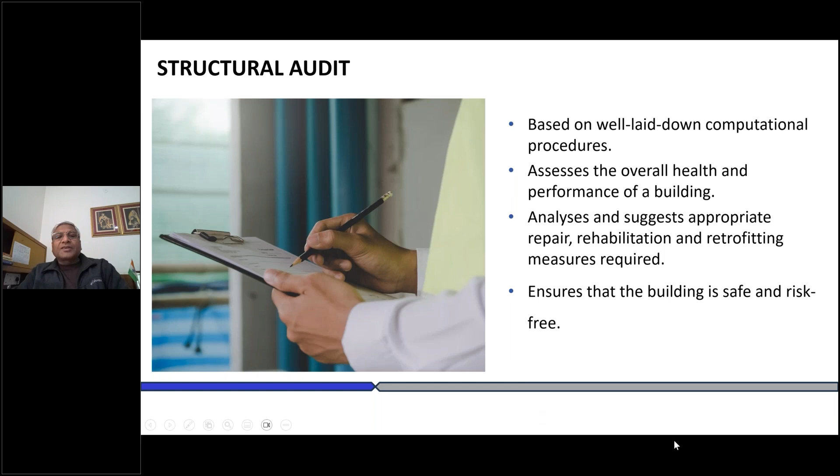Let's understand the other terms also. When we say structural interventions, we have several terminologies like repair, rehabilitation, and retrofitting. Let's try to understand all three terms, what do they actually mean? Because intervention means either you will be doing some kind of repair, rehabilitation, or retrofitting.

Repair is basically intended to improve the functionality of a component in a building that may have been rendered defective, deteriorated, or damaged due to some reasons. Repairs are usually non-structural in nature, but if not attended to, they will lead to more serious implications with time. So if you attend to it and repair it, it will probably increase the life and prevent further deterioration of those structural elements. So this is just repair — you cannot say it is a structural intervention, but yes, it helps in structural safety.

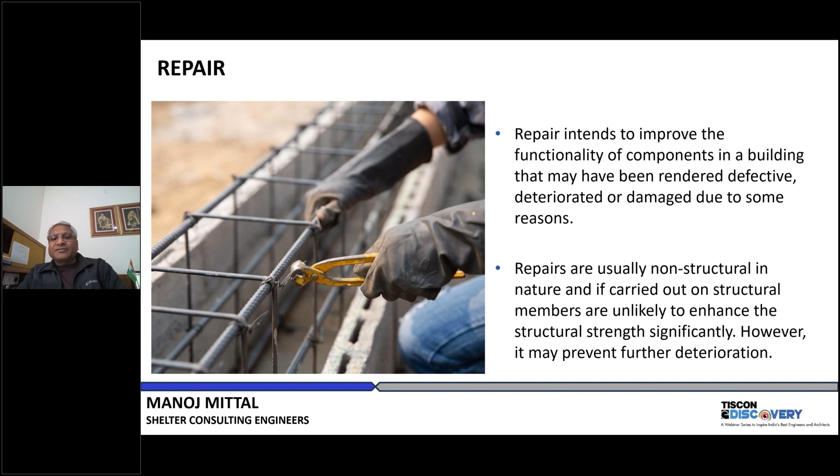Then there's another term, structural rehabilitation. This is the structural intervention to improve the strength of the components of a deteriorated or damaged building. It intends to regain the original strength of those structural members, bringing back any structural member to its original strength.

The term restoration is used interchangeably with rehabilitation. Generally, for historical structures, we can say restoration or rehabilitation. But essentially, rehabilitation means to bring the structural elements to its original strength. Usually this is the meaning of rehabilitation. Rehabilitation is a structural intervention.

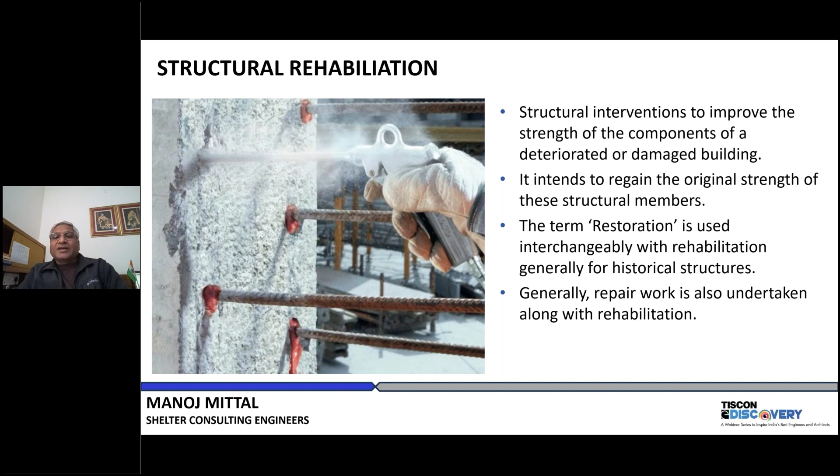Repair is usually not a structural intervention, but it helps in structural safety to some extent. It will prevent further deterioration.

And then there is structural retrofitting. The most commonly used term is structural retrofitting. It aims to enhance the structural capacities like strength, stiffness, ductility, and stability of a building. It mitigates the effect of increased load demands, including future earthquakes. The terms seismic rehabilitation, seismic upgradation, or seismic strengthening may also be used instead of seismic retrofit.

The building need not be damaged for retrofitting, because if you have an existing building, you can still retrofit it for higher demands. There can be several reasons for retrofitting, which we'll see later. But usually these are the terms being used: repair, rehabilitation, and retrofitting.

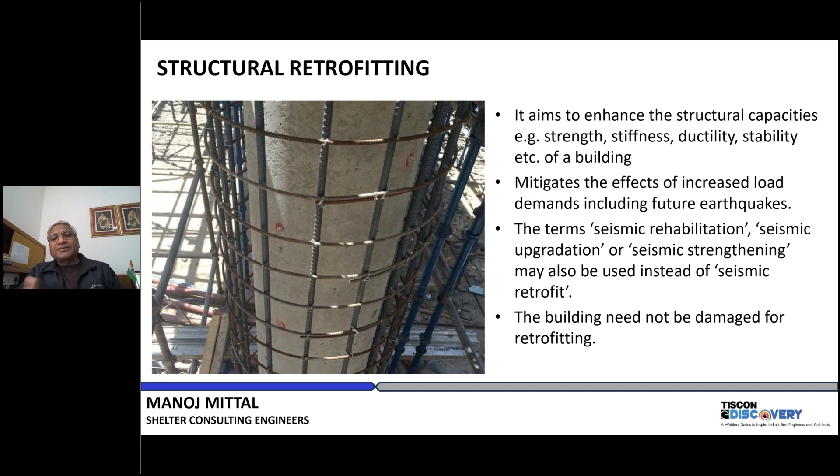So we say repair is not retrofit. If you see this figure, on the vertical axis you have performance, and on the horizontal axis is time. If you do repair, the performance will not increase, but it will not deteriorate either. But if you do retrofit, whether modest or comprehensive, it will significantly improve the performance of the structure, as shown by the small and bigger arrows. So retrofit will increase and enhance the performance of any structure or building.

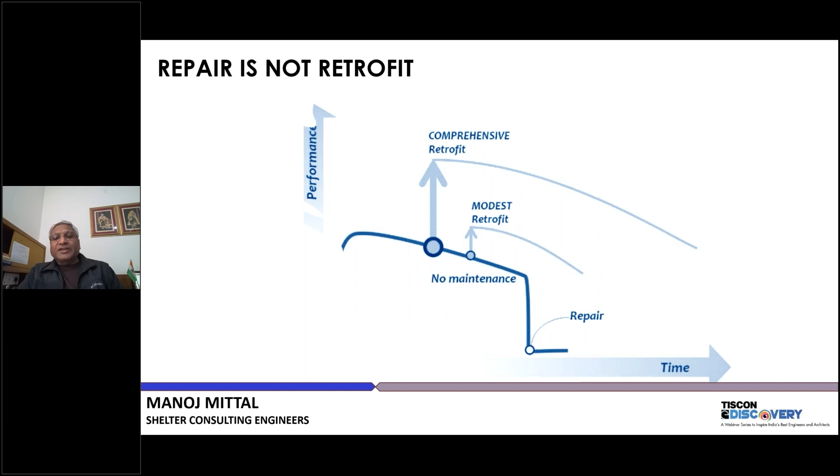So why structural audit of a building? Why do we need to do structural audit when it has been designed and constructed properly? Apparently, if there is any distress in any building or element, we need to think of structural audit.

If there is a change in occupancy, suppose it was a residential building, designed and constructed as residential, and now you intend to use it as commercial or any other use, then you need to have a structural audit to check whether it is safe for the different occupancy or not.

Then if there is damage due to earthquake, fire, blast, cyclone, or any other accident, then also you need to do the structural audit.

And you might be having a building which has been designed and constructed properly, but now the code has been revised. So you might need to understand whether this building complies with the latest standards or not. For that purpose also, you need to do the structural audit.

Similarly, for structural changes - if you want to make some structural changes, for example any vertical or horizontal additions in the building, then also you need to do the audit to check whether the existing structure is safe enough to take the gravity, horizontal, or earthquake loads, or any additions, or whether we should not do it. Basically, you need to do audit before doing any kind of additions or alterations.

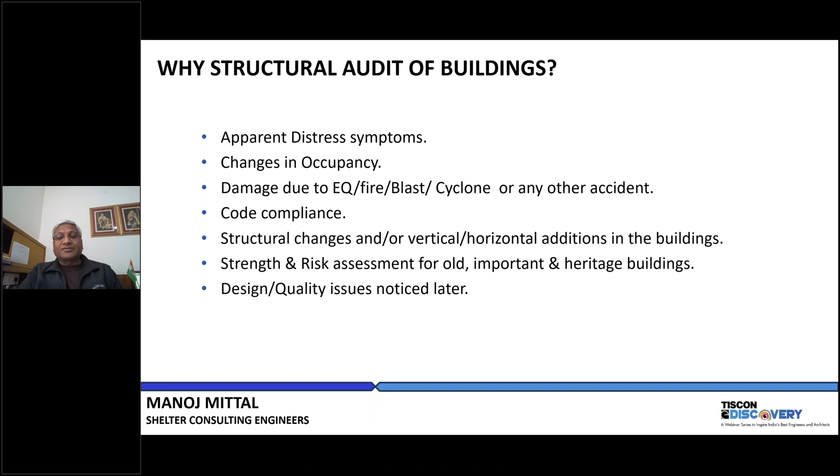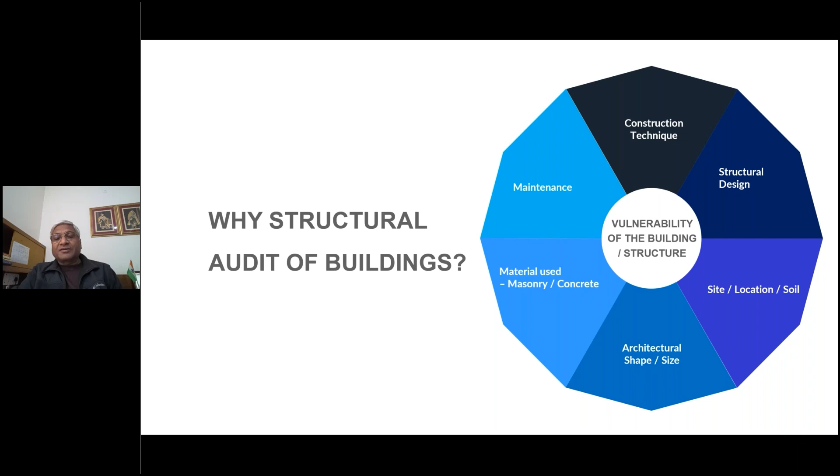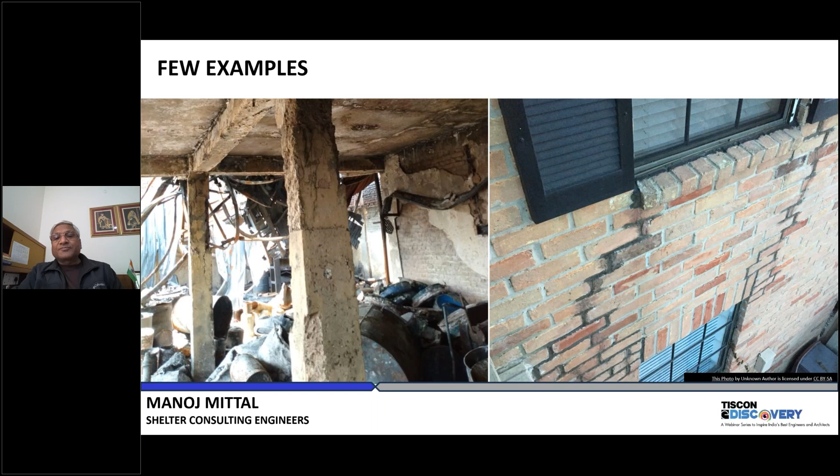When we talk about structural audit, the structure or building can be vulnerable due to the structural design, which may not be done correctly. It may be site, location or soil specific, architectural shape and size, material used, and maintenance or construction techniques. All these things make any structure vulnerable, and we need to take care of them in an audit. These are a few examples - you can see various kinds of damages in buildings, and you can have many examples from your own experience.

So now we have seen why we need to have a structural audit. What is structural audit? What is repair, rehabilitation, and retrofitting? There might be some difference in opinion on the definitions of repair, rehabilitation, and retrofitting, but whatever I have said is most commonly used - this is the most common understanding of this terminology. But that doesn't matter. We will now talk about the process and methodologies of structural audit. Many of us might have done structural audit or retrofitting, but it is very difficult to say what is the best way of doing it, whether we are doing it correctly or not. So sometimes we need to depend upon certain documents, standards or guidelines so that we are on the right track.

So what I will do is try to explain this methodology and process. There is a standard by BIS, IS 15988, which is basically a standard on seismic evaluation and strengthening of existing buildings. My presentation is usually based on whatever is given in this standard. This standard is also under revision, maybe in a year or so, maybe earlier than that - there may be some changes, but at present this is the standard you can depend on for doing structural audit for buildings.

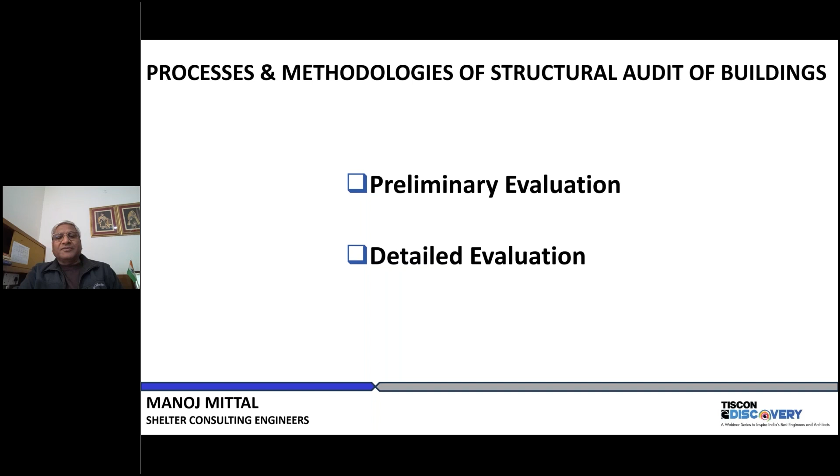So we will start with the preliminary evaluation. What is this? It is a quick procedure to establish the actual structural layout and assess its characteristics that may affect its performance and vulnerability. It's a quick procedure to check the layout, geometry, performance and vulnerability. It is a very approximate procedure based on conservative parameters to identify the potential structural risk of a building, and may be used to screen buildings for detailed evaluation.

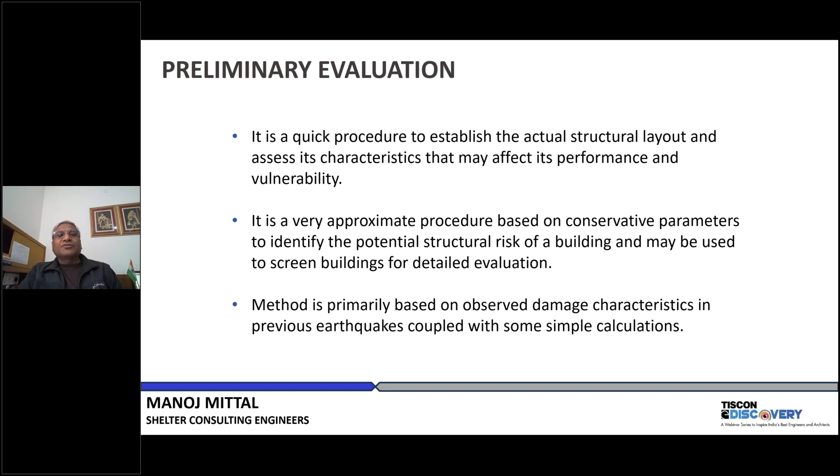Now, if some building fails in this evaluation, then definitely we will go for detailed evaluation. If the building passes this evaluation, probably we will not go for detailed evaluation. Then, if the owner, client or user wants to go for detailed evaluation, you can go for it, or you can just stop at the preliminary evaluation itself. The method is primarily based on observed damage characteristics in previous earthquakes coupled with some simple calculations. So it is a simple procedure to screen the building.

So basically what we do here - number one, first of all, you will do the site visit. In this preliminary evaluation, you will do the site visit. Why will you do the site visit? To verify the available existing building data or collect additional data, and to determine the conditions of the building and its components. It's a physical visual inspection.

So what you will do - the checkpoints - you will see the number of stories, dimensions, year of construction, framing plan, lateral load resisting system, diaphragm connection, wall, basement, foundation system. You will see the soil type, building use, nature of occupancy, adjacent buildings, and whether there is potential danger of pounding and falling hazards, deterioration in materials or damages, and the extent of damage due to earthquake, fire or flood. You'll check for unplanned additions or alterations, undesirable architectural features, liquefiable soil and slope, and look for visual distress symptoms like cracks, settlements, concrete spalling, corrosion, and excessive deformation.

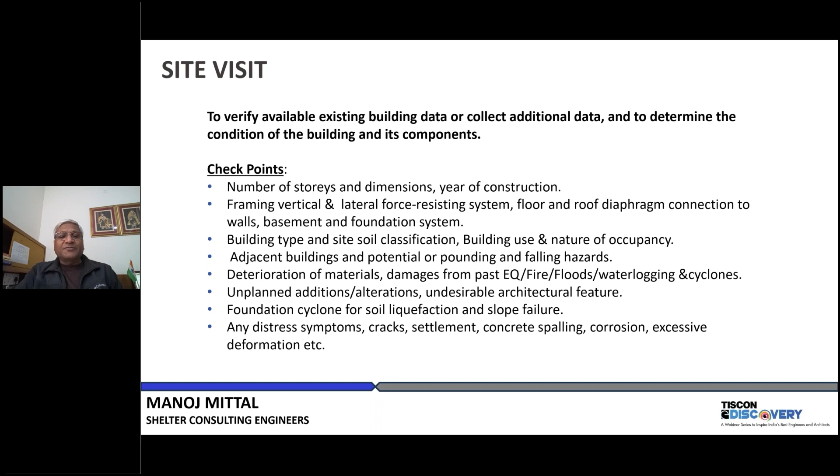Site visit is the first step, and I think this is the most important step to get the data, and whatever data you have, you will like to verify from the site, from the existing building physically. So this is the most important step actually.

How will you say that, okay, you have seen the site, you visited site, you saw all kinds of symptoms, and then how will you say that my building is okay in prelim evaluation or not?

Basically the standard 15988 says, and most of the provisions are something like IS 1893 part 1, which is earthquake resistant design of RCC building. It says that you need to do two kinds of checks. One is configuration related checks, and the other is strength related checks. In the configuration related checks, we need to examine the structural integrity like load path, redundancy, geometry, weak story, soft story, vertical discontinuity, mass irregularity, torsion, adjacent buildings, short columns, deterioration of the concrete or steel, mezzanine, loft or subfloor. So all those things you have to check.

Now, if any of these things exist in the existing building, it means your building will need to undergo detailed evaluation. Similarly, you need to do the strength related checks.

What are those checks? These are the quick checks to compute the strength and stiffness of the building components. What are those? Shear stress in RCC frame columns, shear stress in shear walls, shear stress checks in RCC, masonry infill walls, and axial stress in moment frame.

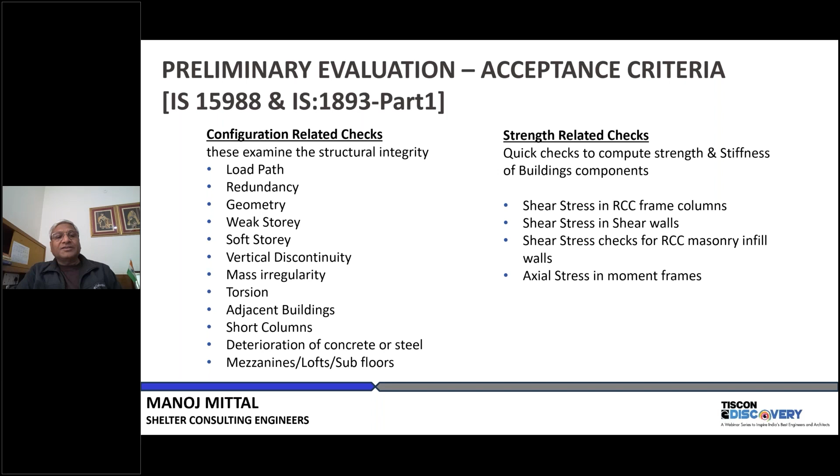So we will see some of these checks, how to do it. Basically, load path: any structure shall contain at least one rational and complete load path for seismic forces from any direction, x direction, y direction. There should be one clear, rational, and complete load path to transfer the load.

Redundancy: the number of lines of vertical lateral load resisting elements in each principal direction, x and y direction, shall be greater than or equal to 2, at least 2 or more. Similarly, in case of moment frames, the number of bays in each line shall be greater than or equal to 2. Similarly, the number of lines of shear walls in each direction shall be greater than or equal to 2.

Now see, this is very simple. This can be checked very easily. You have a shear wall, whether there is only one shear wall on one side, that is not acceptable. So there should be at least 2 shear walls in each direction. It's a very common sense. So this can be checked physically by drawing or by site visit under this prelim evaluation.

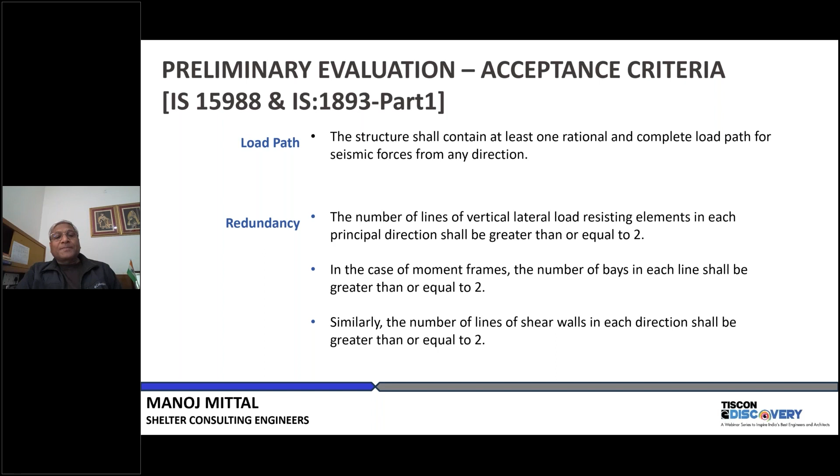Then geometry: if there is more than 50% change in the horizontal direction of the lateral force resisting system within the story. Similarly, you have to check the weak story, soft story. What is weak story? The strength of the vertical lateral force resisting system in any story shall not be less than 70% of the strength in adjacent story. Soft story: the stiffness of vertical lateral load resistance system in any story shall not be less than 60% of the stiffness in any adjacent story, or less than 70% of the average stiffness of 3 floors above.

Vertical discontinuity: there should not be any vertical elements in the lateral force resisting system that are discontinuous. They should be continuous from the root to the foundation, from the top to bottom. There should not be any discontinuity. So all these checks we need to do in this mass irregularity.

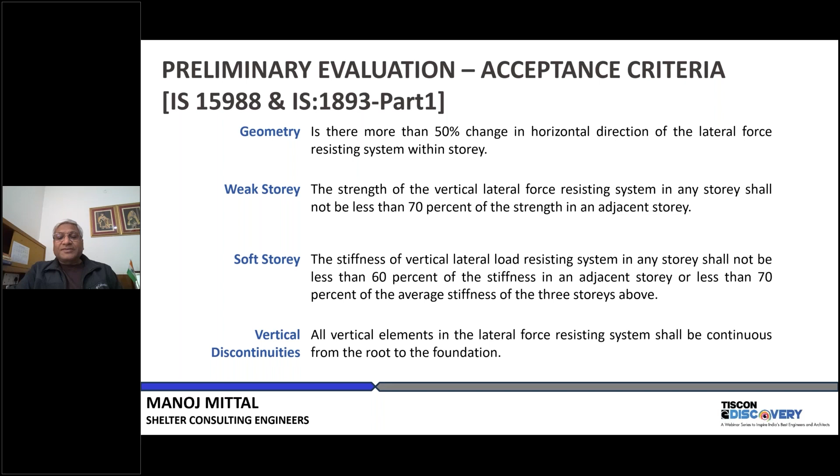If there is a change in mass of more than 100% between stories, then there is a mass irregularity. You have to go for detailed evaluation.

Similarly, the torsion: the estimated distance between the story's center of mass and the story's center of stiffness shall be less than 30% of the building dimension at right angle to the direction of the loading considered. You need to check this.

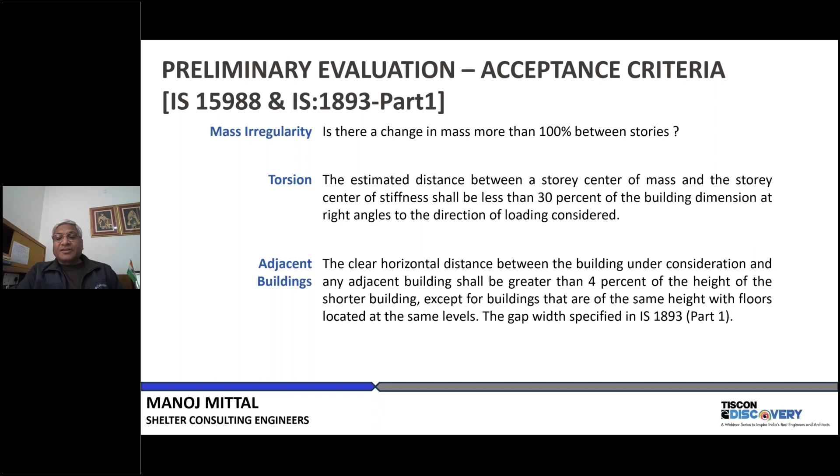Adjacent building, you need to check this also. Similarly, you need to check whether there is any deterioration of the concrete or steel. If there are such symptoms, then probably you need to go for detailed evaluation. So all these aspects you need to consider during preliminary evaluation by physical inspection at the site, as well as by going through the drawings.

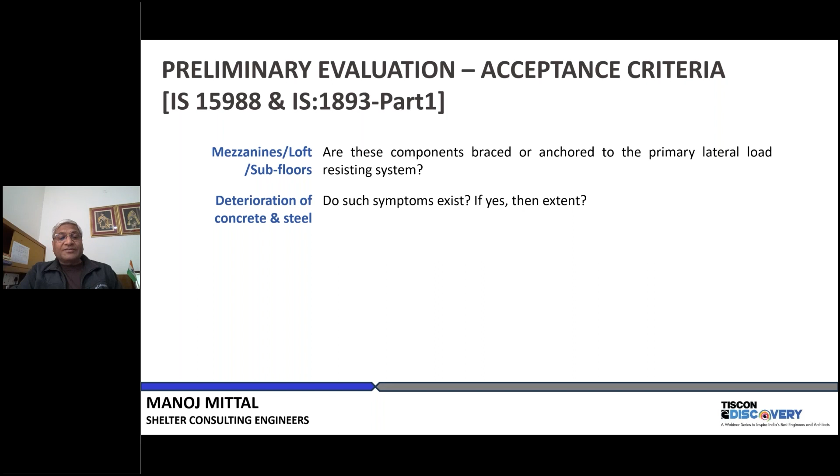But things become complicated when you don't have the structural drawings. So we'll talk about that also. So this is the geometry. I think everyone must have seen all these things. These are the geometries, good or bad practices.

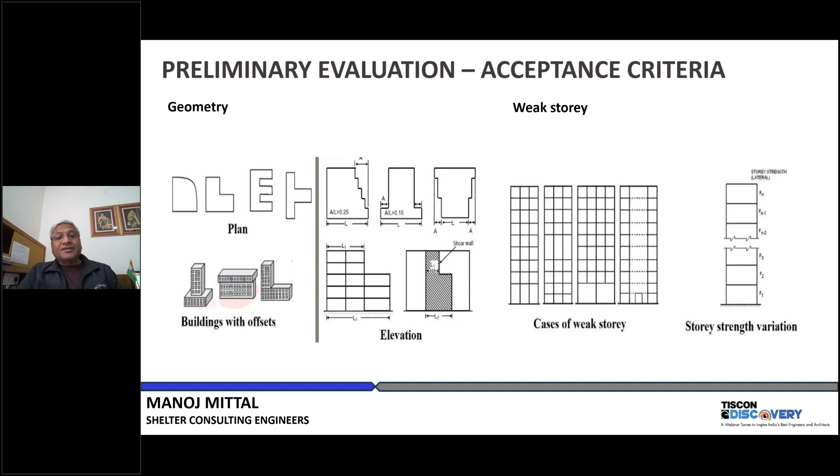We all know we need to see all these things: what are the setbacks, what are the weak or flexible stories, whether the foundation is on sloping ground. If there is a problem, then you need to go for detailed evaluation. If there are floating columns, there is a problem - you need to go for detailed evaluation.

If there's a discontinuity of the structural members - you can see on the right hand bottom side you have a wall which is not going till bottom, till the foundation. It is discontinuous. Any qualified engineer can make out all these such things.

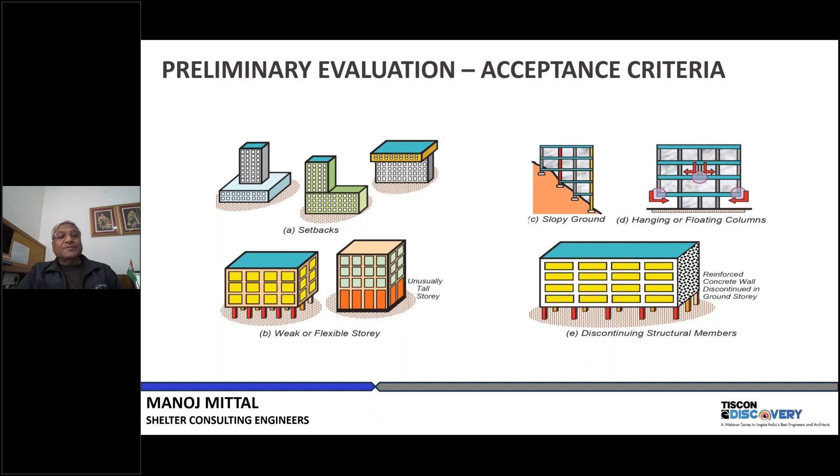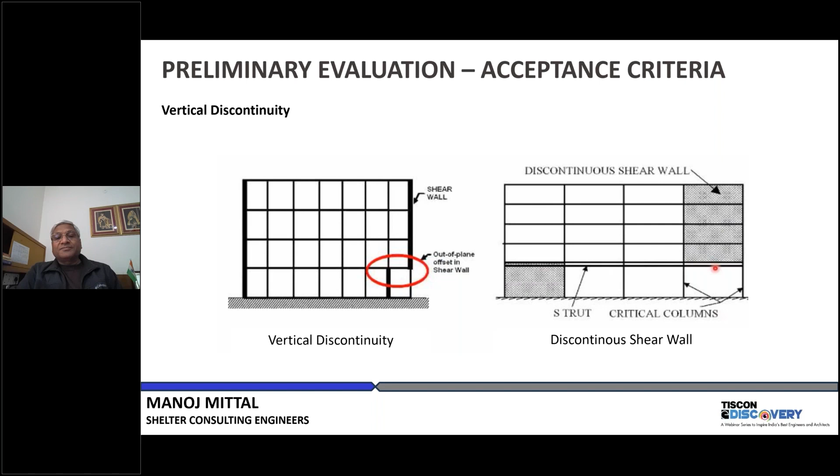This is the distance between the two building blocks. There is a possibility that when the building was constructed, there was only one building block. Maybe with time another building block might have been constructed later on, and the distance between the two might not be enough. So you need to check this also.

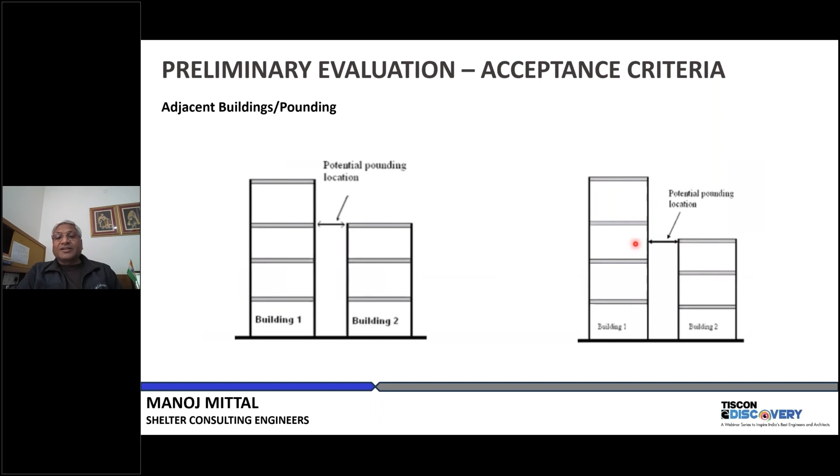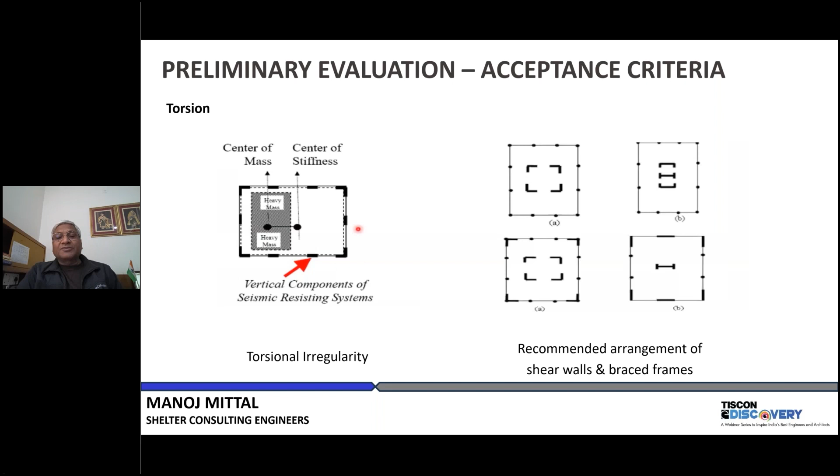This is about torsion. I was talking about center of mass and center of stiffness, and the recommended arrangements of shear walls - we all know about this. We also know about the strong column, weak beam kind of thing. This can also be seen. So that was configuration related checks.

And now we should also do the global strength checks. Now, what are these checks? This is the expression given in this standard: F0 is equal to two by three VB by NF into H by L.

H is the total height of the building. L is the length of the building in the direction we are considering. VB is the base shear, and NF is the total number of frames in the direction of the loading. So what it says is: calculate F0. I think VB can be calculated, and NF can be calculated, H and L we also know.

Then if we divide this by A, which is the area of the columns, we get axial stress F0 by A in columns of moment frames at the base due to overturning forces alone. If you divide this F0 by the cross-sectional area of all the columns of the moment resisting frames, it should be less than 0.25 FCK MPa, where FCK is the characteristic strength of the concrete. If it satisfies this requirement, then we say it's okay. If not, then go for detailed evaluation.

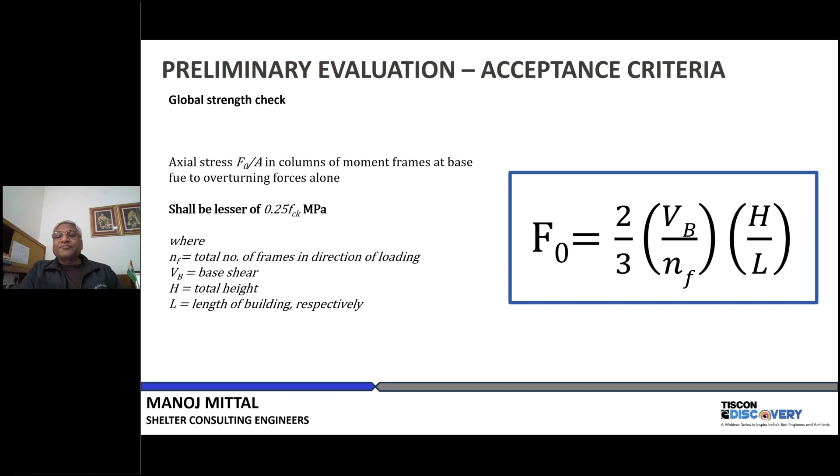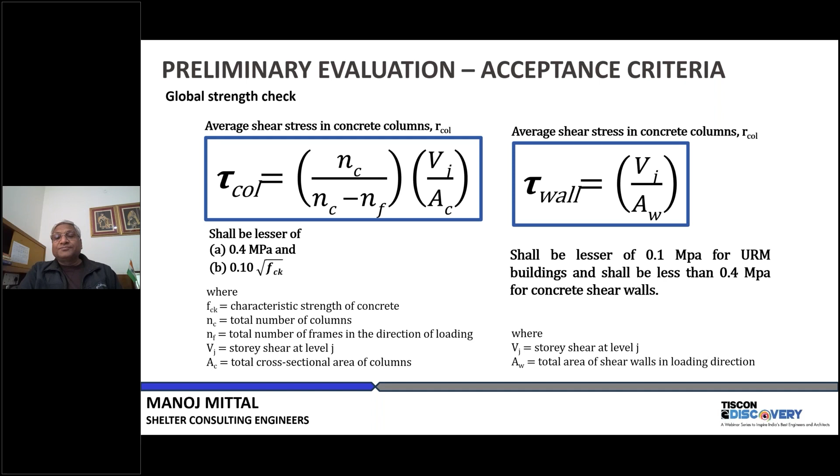So this can be done. These are the very quick calculations which can be done as given in the code. After doing all those things, it says go for detailed evaluation if the building fails in preliminary evaluation, meaning geometrical checks, configuration related checks, discontinuity, and then strength checks by calculating axial stress, shear stress, and all those things.

If the building fails in any of that, you need to go for detailed evaluation. It also says if the building is 6-story or higher, definitely go for detailed evaluation, don't depend upon the preliminary evaluation. If the building is located on liquefiable soil or near an active fault zone, definitely go for detailed evaluation. And if there's a building with inadequate connections or joints in any way, go for detailed evaluation, don't depend upon preliminary evaluation.

So probably many buildings—say 6-story or any building 15 meters or lower—can be checked with this approximate and simple procedure, and some buildings may be required to go for detailed evaluation. If you want to go for detailed evaluation for any building, there is no problem, you can do it. If you have time, you have money, and the owner wants it, you can do it.

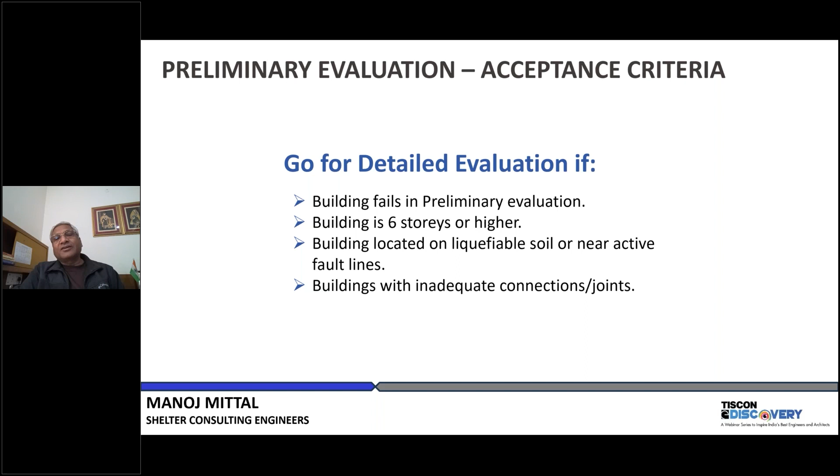Now another important step is detailed evaluation, which we do most of the time for any complicated or large building. So basically in this we talk about the probable strength of the structural elements. We need to check what is the probable strength of the structural elements. It is determined and compared with the expected load demands.

We calculate the expected load demand, and we also calculate the probable strength of the existing structural elements. So it is like any structural design project actually. Another thing is that load demands and capacities are calculated by conventional means and applicable codes.

The only thing given in the code here is that they are modified. Whatever load demand and capacities are calculated by conventional means—which we usually do by IS 1893, 13920, or other standards, software tools, or procedures—here we say we need to modify them with an appropriate knowledge factor K. I will talk about knowledge factor K. They also say the seismic demand shall be modified with a usable life factor U. So there are two factors, K and U, which have to be applied to modify the load demands.

Seismic demand and the capacities. Then we also need to check the building components—check whether there is any deterioration of the concrete, cracks in the boundary column, or diagonal cracks wider than 3 millimeters. We also need to check what is the residual strength of the materials, because somebody might have designed the structure or elements with some grade of strength, and over time you may not have that strength anymore. So ultimately we need to see the residual strength of the materials, which can be tested by NDTs and other lab tests.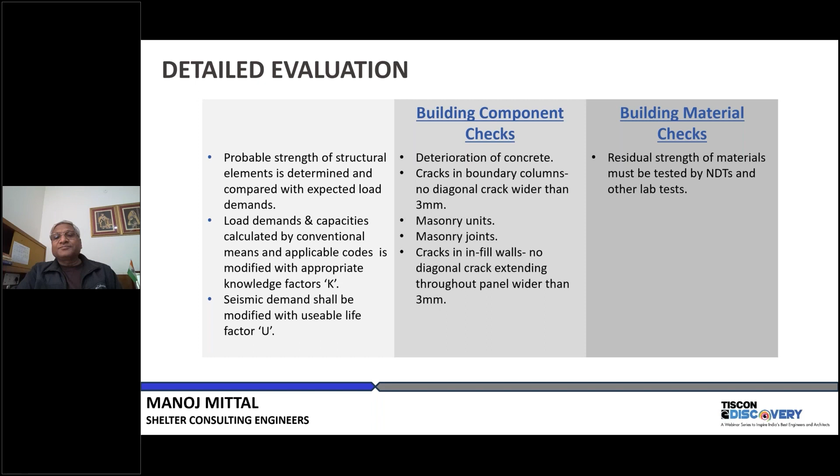This is a knowledge factor K. What is knowledge factor? It says that when you are seeing an old, occupied building, you may not get the full data of it. You may not have access to the drawings, you may not be able to visit the site properly, and you may not have the design parameters of the existing building. So there are various knowledge factors associated with each kind of condition.

They vary from 1 to 0.5. 1 means whatever you are getting from testing, just consider 1. If there are some limitations, then multiply by 0.9, 0.8, 0.7, 0.6, or 0.5. So ultimately multiplying the capacities of the element by these values means you are accounting for a knowledge factor.

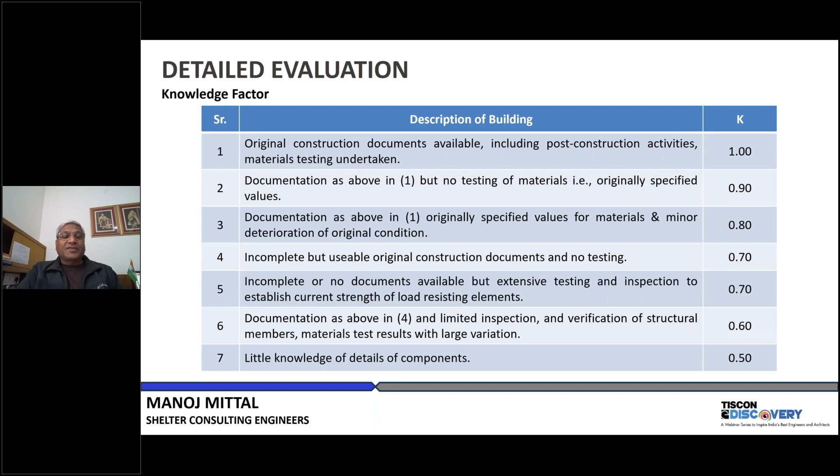For example, serial number 1 says original construction documents are available, including post-construction activities, and material testing undertaken. It means you have every data available of the structure, so you take knowledge factor 1. The last case is little knowledge of the details of the component - you don't have the drawings, you cannot have any test data, so just take 0.5. This is the knowledge factor which is applied to the capacities.

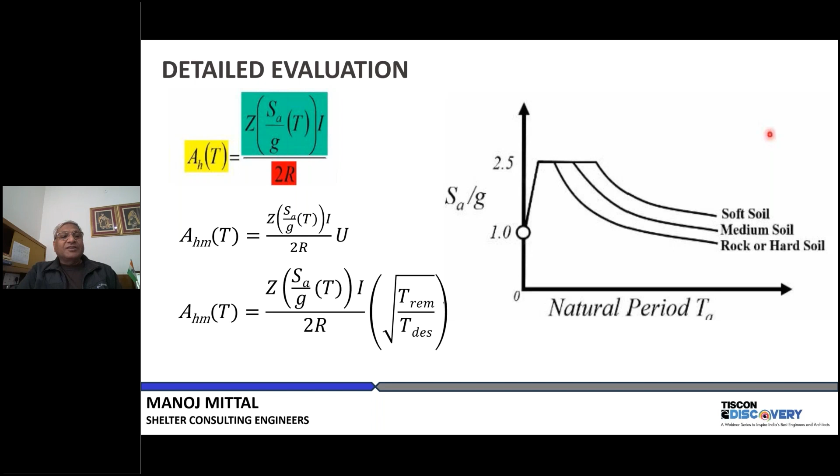So what is U? U is basically the under-root of T remaining divided by T design. T remaining is the remaining useful life of the building, and T design is the design useful life of the building. So divide this by that and take the under root.

This will be the factor U, and you multiply whatever force you get by U. Ultimately this U will be less than 1. So what you are trying to do is reduce the seismic force by a factor U, and this factor U will depend upon the age of the building.

If your building is old, then probably the U factor will be less. If your building is very new, then the U factor will be more. So the horizontal force to be considered will be less for an old building, and more for a newer building. But it also puts a condition that U shall not be taken less than 0.7 in any case.

If by this formula, T remaining by T design under root, it comes out less than 0.7, you still have to take 0.7 at least. So at least you have to design for 70% of the force which you are getting from IS 1893 at present. This is the provision you can consider in your design.

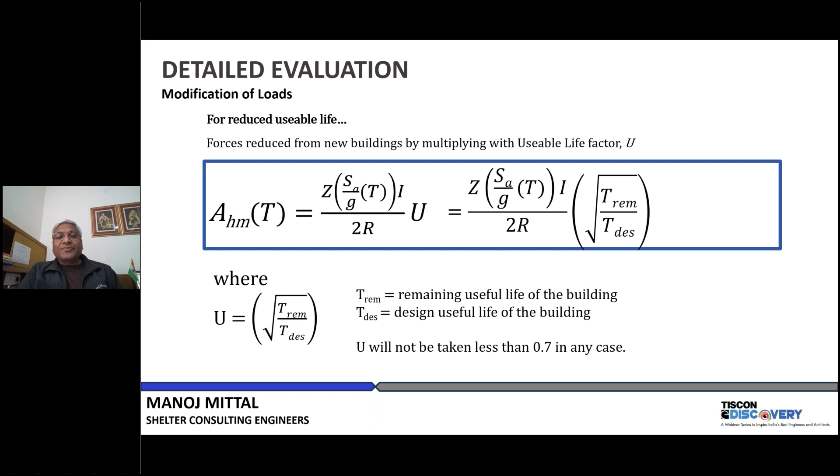So this is what I have talked about. This way you can reduce the demand, and capacities you can always reduce by applying the factor K, which will vary from 1 to 0.5.

Basically what we are doing is estimating the flexural and shear strength of the structural element, member and joints as per the standard, as per IS 1893 and other standards, by conventional methods we usually use in our buildings, then modifying with the knowledge factor K, calculating the design base shear and multiplying it by U for analysis purposes, then performing the analysis - making the mathematical model, doing analysis, whatever else we do - and then checking the acceptability of each component with the estimated probable strength of the member.

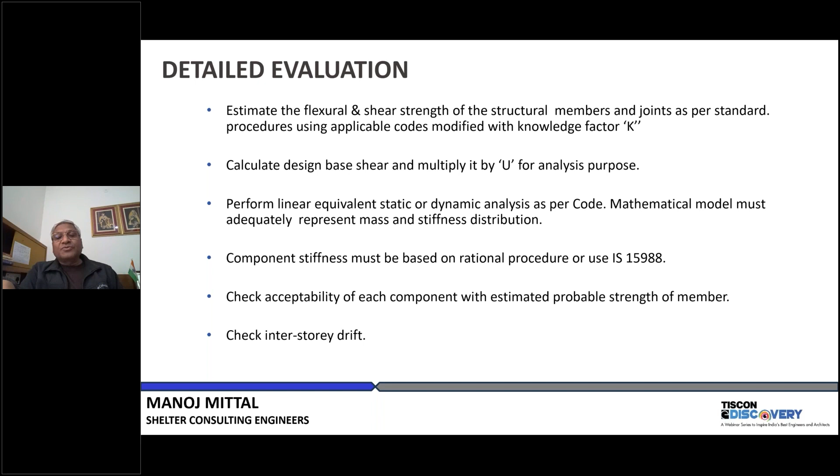Ultimately what we are doing is the same analysis, but in the design we reduce the seismic load demand by a factor U, and we reduce the capacity by knowledge factor K. That will depend upon your situation - U will depend upon the age of the building. Then while doing the analysis, before that you will also do other tests, like NDT, to check the residual strength of the material, say concrete.

So whatever you are getting by NDTs or other means, you will use that for your analysis purpose. Geometry, size, everything you will take as per the drawing or whatever is existing at site. Then you will analyze the structure as per the codal requirements, and see which elements are safe, which are not safe, and what inadequacy exists. This is the detailed part.

After doing all these things, we have to see that either of the two must be satisfied: all critical members have strength greater than the computed actions, and drift checks are okay. If it's okay, all members are okay, right?

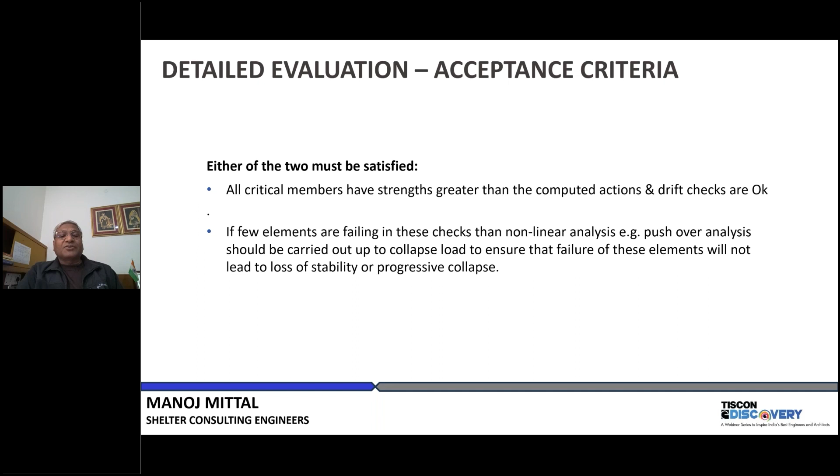If the members are not okay, and a few key elements are failing these checks, then probably you need to go for non-linear analysis or pushover analysis to ensure that failure of these elements will not lead to loss of stability or progressive collapse. So this is what we need to do.

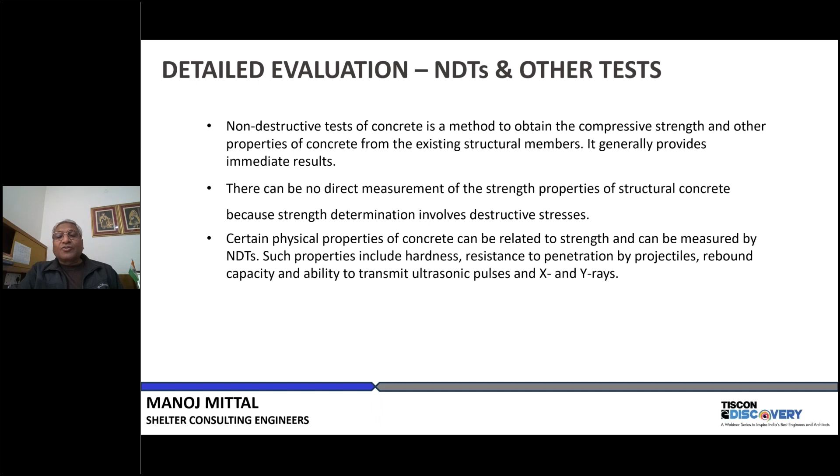Ductility we have to see, NDT, detailed evaluation. As I already told you, we need to do certain NDTs and other tests. There are several tests, I will not go into detail, but things like rebound hammer, ultrasonic pulse velocity, pull out test, core test.

Once you have done all those things, if your building is okay with preliminary evaluation, it's okay. If it's not, then you go for a detailed one. Even after detailed evaluation, if you find inadequacies in the members, then you need to do some kind of structural intervention. That intervention will depend upon the kind of inadequacy you are having in your structural elements or system.

So what are the strategies we should focus on? Strengthening at member level - building with sufficient strength and stiffness at global level. The building is safe in strength and stiffness, but some elements may be lacking in strength, stiffness, or ductility, or there might be some other issues with some elements. Then probably we can strengthen those elements by way of jacketing or some other methodology. Another strategy may be eliminating or reducing structural irregularities.

My structure might be having issues because of structural irregularities. What are those irregularities? We discussed earlier - mass irregularity, soft story, weak story, and all those things. They are all irregularities, discontinuity of vertical elements, all those things.

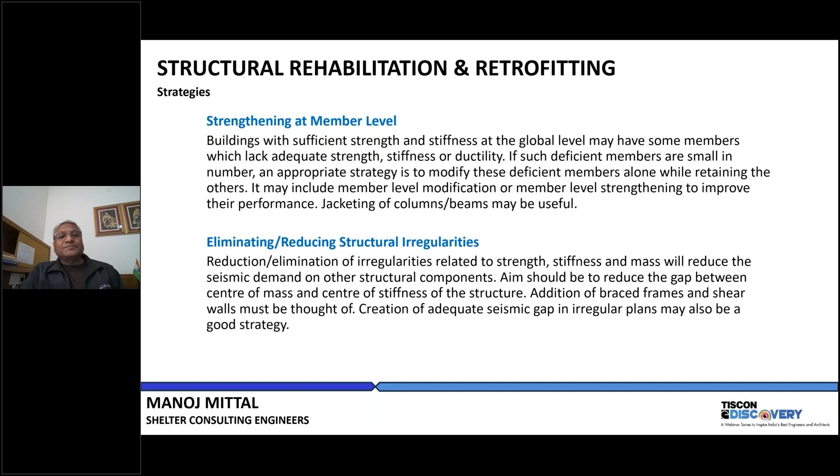We just need not to strengthen all the elements - we need to think about what our strategy is. Strengthening at the structural level: if the structure has more components which do not have adequate strength and ductility, then an effective way may be to strengthen the structure to reduce the overall displacement demand. It may further enhance the force demand on some other elements.

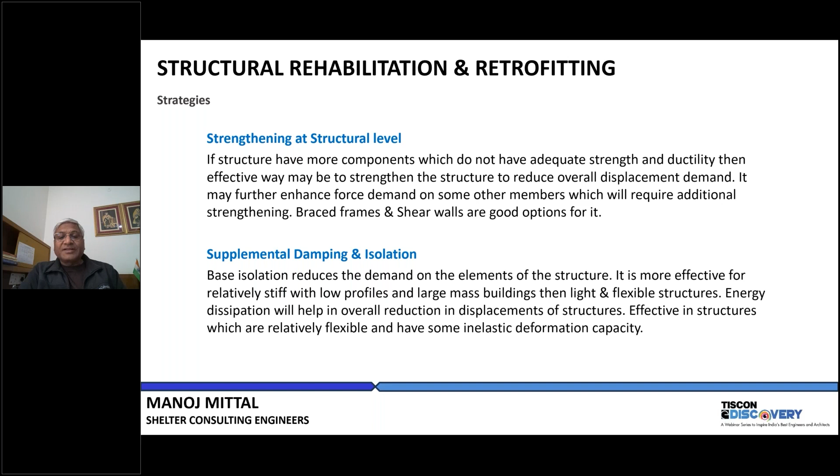So if you are adding some element somewhere, brace frame or shear wall is again good, supplementing with damping and isolation. I think everybody knows that if we can add some damping devices, or some kind of base isolation, that will definitely reduce the demand on existing structural elements, and probably we need to do less intervention in existing elements. So these are the strategies.

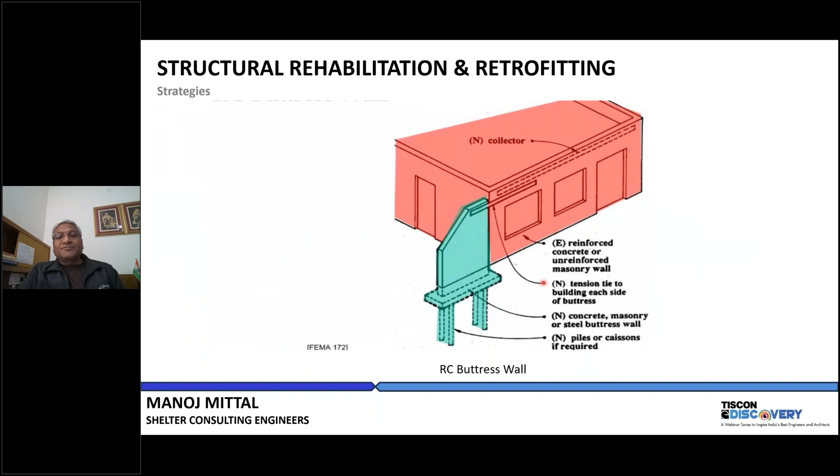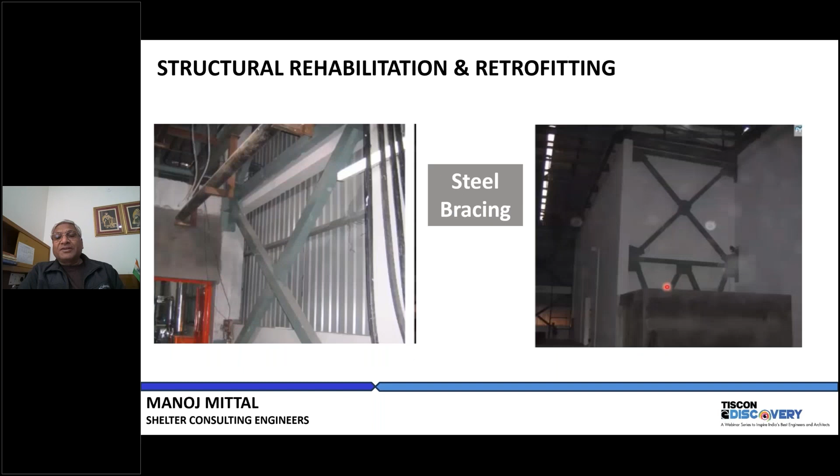I think we all know this. For example, if we can have something like this, it will enhance the addition of the shear wall. If we can add shear wall, if we can add braces - these are just some examples. So if you need to do some kind of intervention, I think I have only 5 minutes.

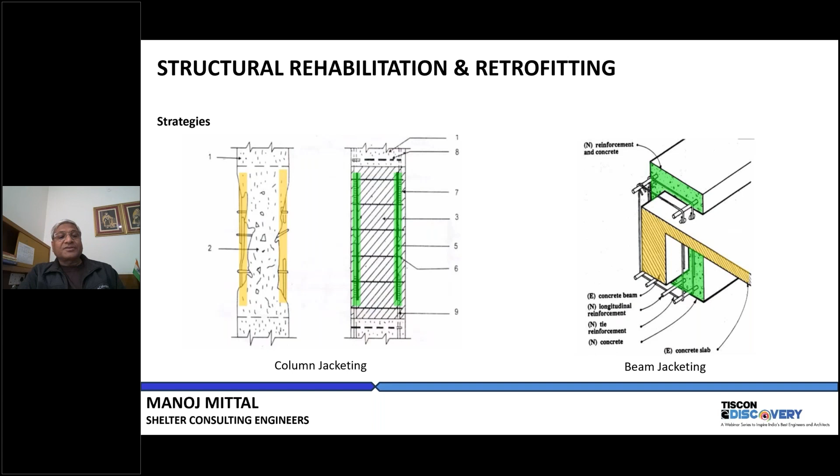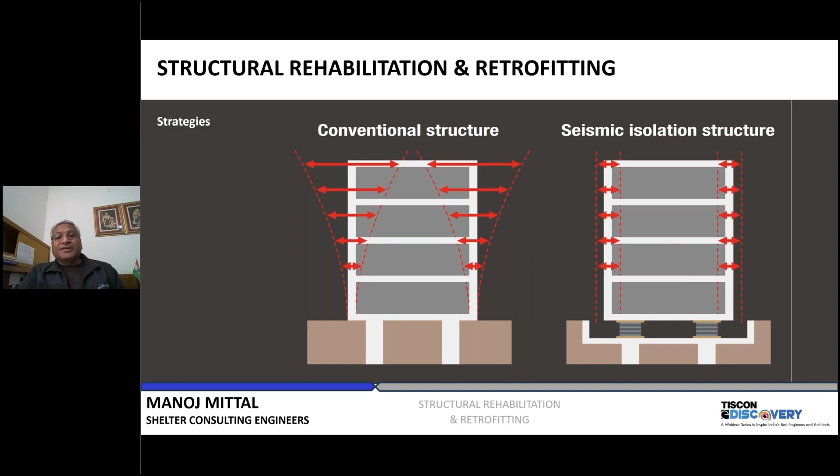So if we need to do some element strengthening, then column jacketing is one option, beam jacketing is another option, and then this jacketing can be with steel, carbon fiber wrapping, and then base isolation. We can strengthen the foundation also if required, and jacketing may be with RCC, steel profile, steel encasement, or wrapping with FRP.

Deficient members must first be stress relieved by propping. This is another important point. Before we do this jacketing or any kind of strengthening, first we must relieve it from stress by propping, then do the strengthening process, and then we should remove the props.

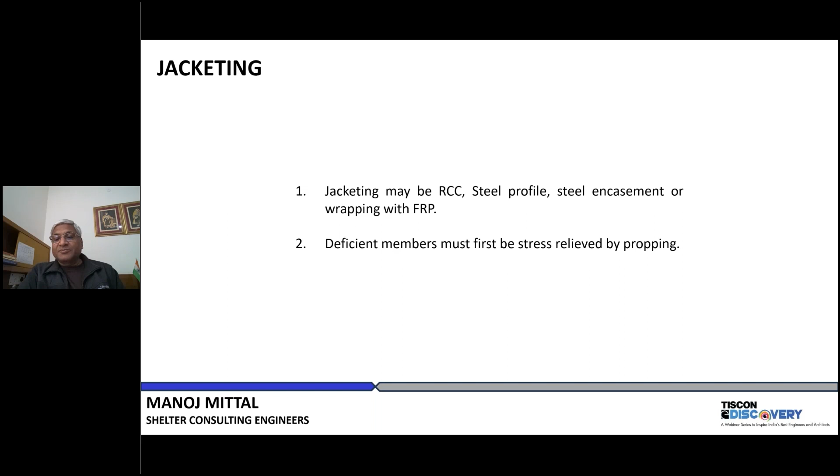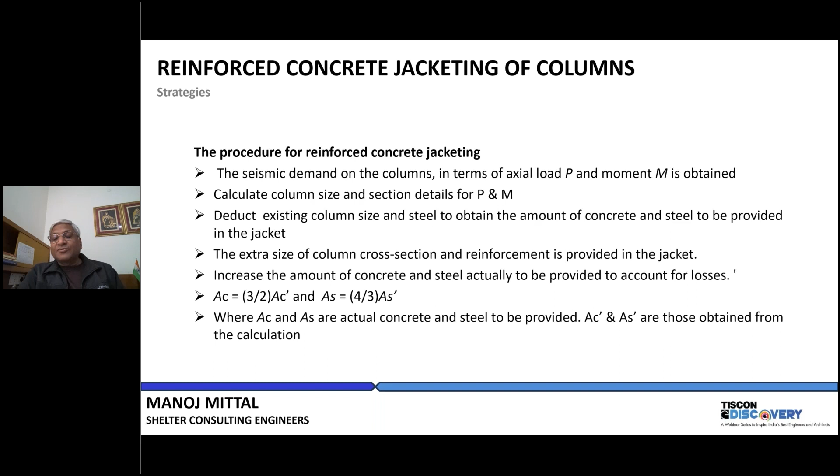I cannot go into the details of jacketing, but how to calculate the thickness of the concrete jacket and everything is all given in this standard. If you go for this standard, you can calculate it, some very simple things are given there. I will not cover it, time is not there.

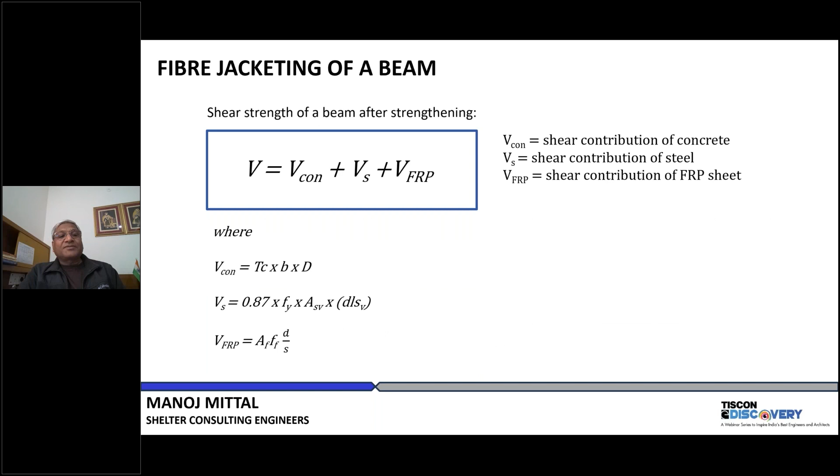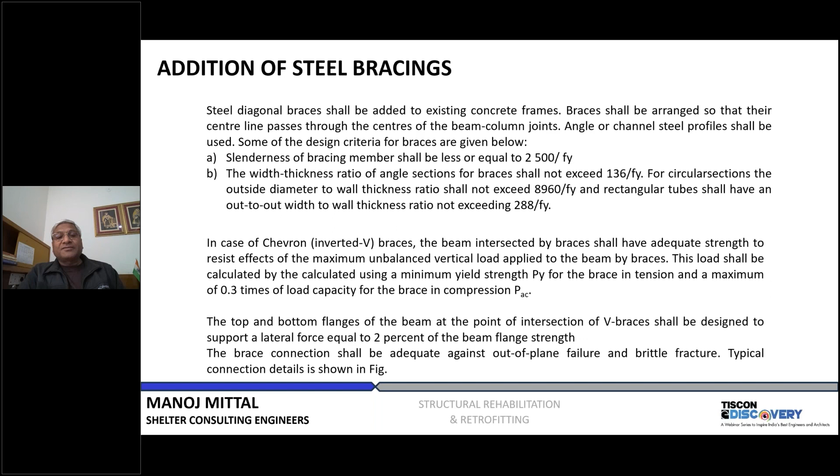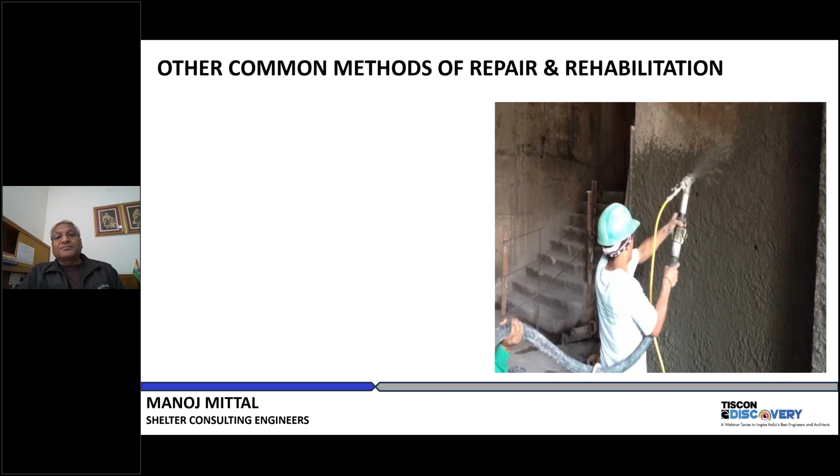These are the steps for calculating thickness of the shear wall, reinforcement, and all those things are given in the standard, along with bracings, connections, and other things you can do. These are some visual pictures of doing jacketing, or even you can do repair and rehabilitation of masonry structures, and there's another standard for that.

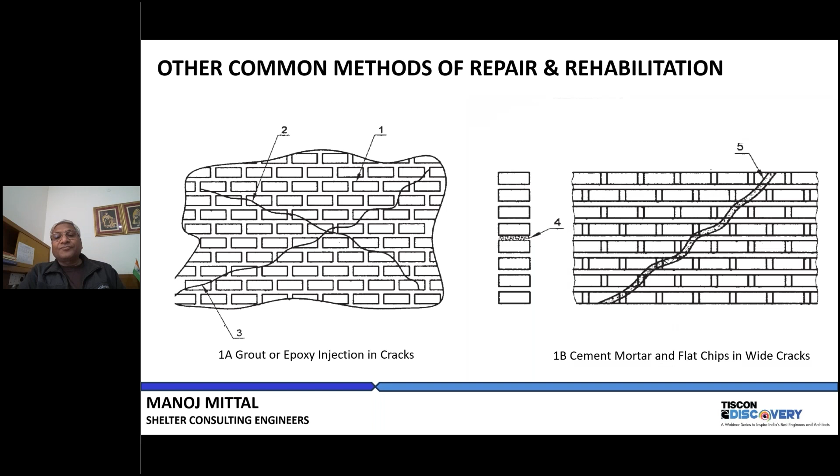When to repair, rehabilitate or retrofit, usually there is no fixed rule for that, but we say that if retrofit or rehabilitation cost is less than 60 to 70%, except for heritage or historic structures, then we can go for retrofit or rehabilitation work. Because in case of heritage or historic structures, you cannot put any such condition.

Estimated time needed for implementation and disturbance to occupants are other factors which need to be considered while taking a decision whether to repair, rehabilitate or retrofit any structure.

So basically this is a standard which gives you guidelines on how to go about it, how to take care of the knowledge factor, and all those things. Also, you may need to do detailed evaluation for certain structures or situations, but it is up to you whether you want to do detailed evaluation for all buildings or not. This is usually the process, and then ultimately you have to prepare the report and the detailed specification for retrofitting, rehabilitation, whatever.

So I think I will end here, and if you have any questions, I will take the questions.